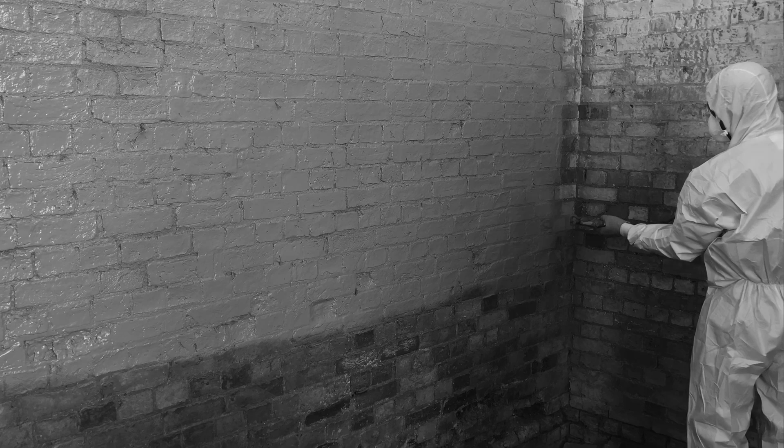Welcome to Intelligent Membranes CPD: Advanced Technology for Achieving Airtightness. We explore the benefits of liquid-applied airtight membranes, how they can be used by main developers, house builders, and contractors to achieve better airtightness performance, which will allow you to provide superior comfort for occupants and users.

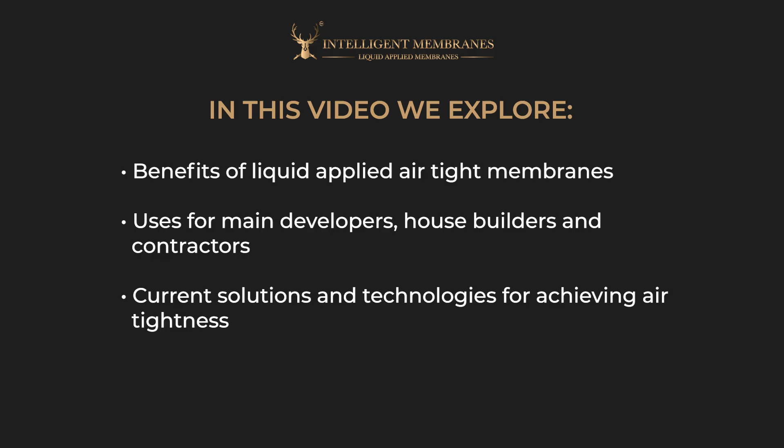Current solutions and technologies for achieving airtightness, and a balanced overview of their pros and cons. Throughout this presentation, we will be making reference to our liquid-applied airtight vapor control coating and how it's revolutionizing the way professionals within construction deliver safe, effective, and sustainable outcomes. We hope you come away with a fresh perspective and an improved understanding of liquid-applied airtight membranes.

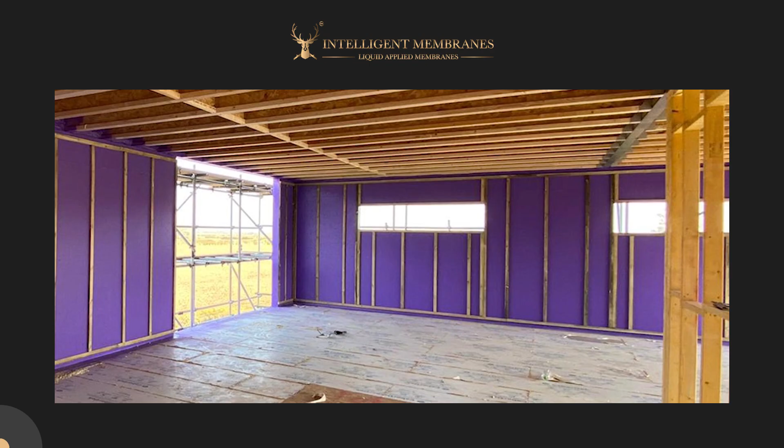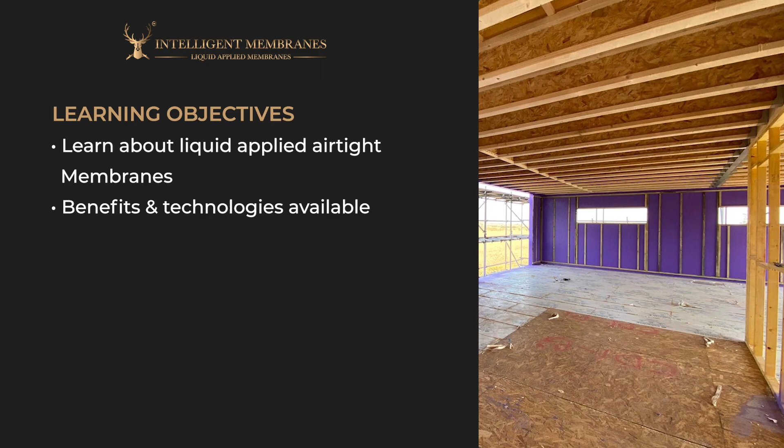We'll begin by outlining the key objectives and success criteria. We will learn more about liquid-applied airtight vapor control membranes and their benefits, and understand the airtightness technologies available. By the end of the session, we hope you will understand the different solutions that are available for achieving airtightness, gain more understanding of the latest regulations around airtightness, and gain more clarity on what makes a liquid-applied membrane effective. We'll address these learning objectives at the end of the session. We recommend making a note of these objectives to use as reference points throughout.

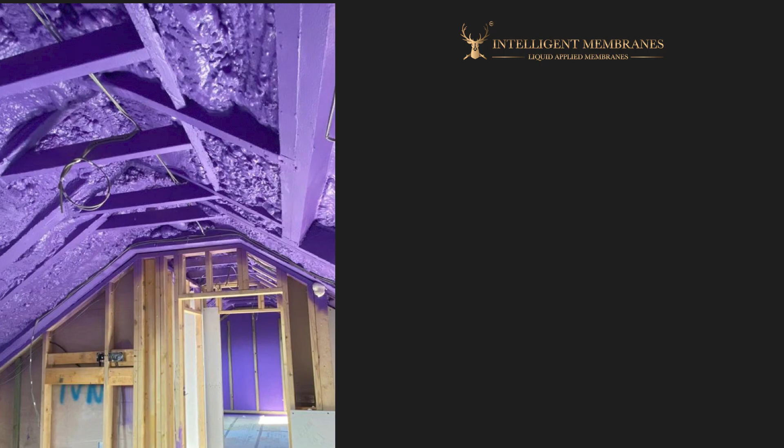However, what is expected and what is achievable are two different things. Quite often, changes in building design and improvements in fabric all have significant cost implications. Here at Intelligent Membranes, we believe that superior effective airtightness should be accessible for all buildings. If we seek the definition in approved documentation, then Approved Document F, ventilation, defines airtightness as a general descriptive term for the resistance of the building envelope to infiltration with ventilators closed. The greater the airtightness at a given pressure difference across the envelope, the lower the infiltration.

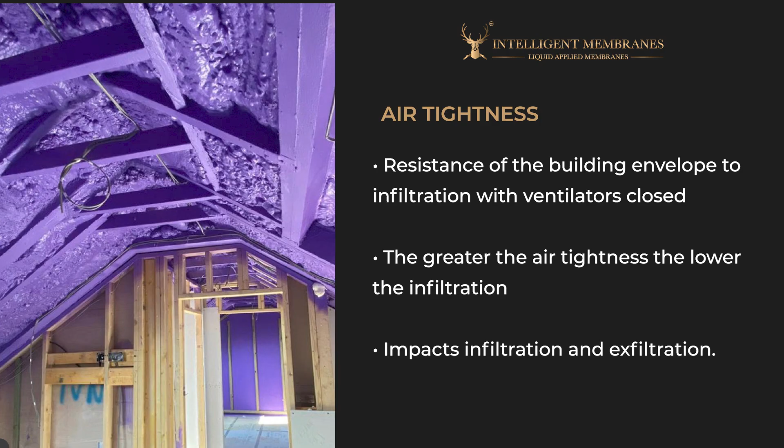Airtightness is the fundamental building property that impacts infiltration and exfiltration: the uncontrolled inward and outward leakage of outdoor air through cracks, interstices, or other unintentional openings of a building caused by pressure effects of the wind and/or stack effect. As you can see from the image, air leakage can occur in multiple places throughout the average household. For example, junctions between walls and other walls or floors, junctions between window frames and walls, electrical equipment and access doors and other wall penetrations. The orange arrows represent air leaking out of the house, whilst the blue and purple arrows demonstrate air leaking into the house.

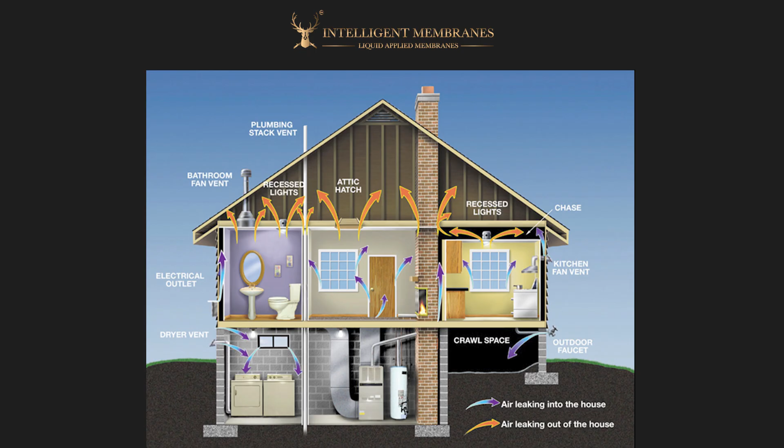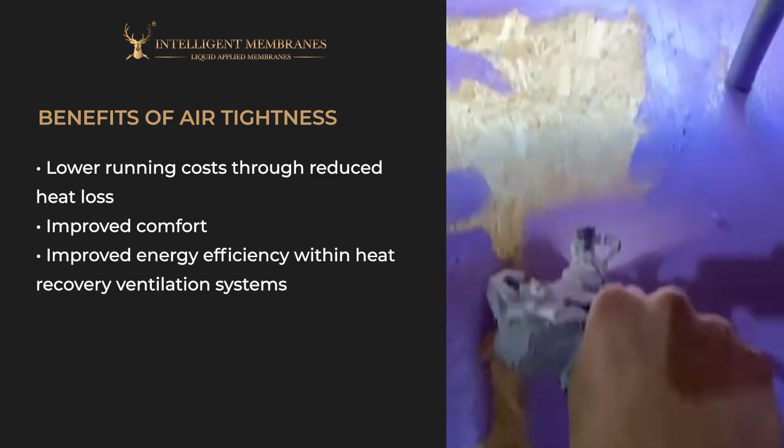An airtight building means an energy-efficient building. Because the mixing of indoor and outdoor air is limited, users will benefit from reduced energy bills from heating and cooling. Energy Star, a government-backed program which provides certification to buildings and consumer products which meet certain standards of energy efficiency, has conducted research on commercial buildings and found that a property can waste as much as 30% of its energy usage due to airtightness issues. By making small upgrades, the energy efficiency of a building can increase by 10%. Having an airtight building has many benefits. These include lower running costs through reduced heat loss, improved comfort, improvement in energy efficiency within heat recovery ventilation systems, improvement in the energy efficiency of the entire building, and reduction in moisture infiltration levels.

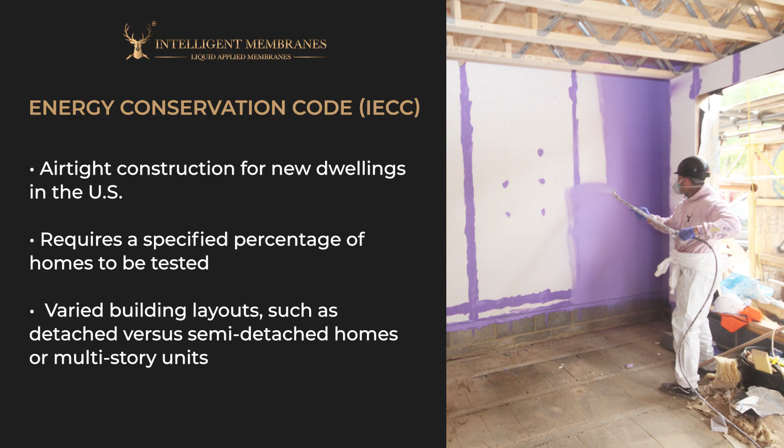The International Energy Conservation Code, IECC, alongside local codes, mandates airtight construction for new dwellings in the U.S. Airtightness testing, aligned with stricter IECC versions, is a standard for new constructions, requiring a specified percentage of homes within a development to be tested. This selection includes varied building layouts, such as detached versus semi-detached homes or multi-story units. The regulations aim at energy consumption reduction, specifying that buildings undergo airtightness testing through the blower-door method per ASTM E779. This involves building pressurization and thermal imaging to detect leaks, setting forth maximum air leakage rates, with a best practice goal to surpass these minimum standards for enhanced energy performance.

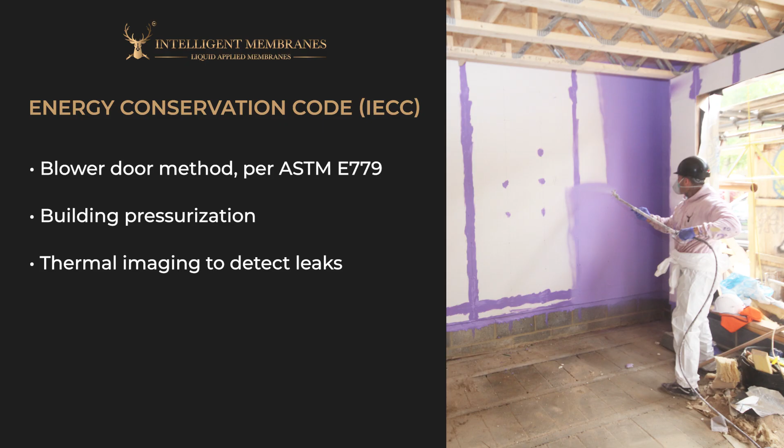Industry discussions suggest updates like pulse testing could refine testing accuracy and compliance stringency, highlighting the importance of evolving standards for energy conservation. Next, U.S. ventilation and energy efficiency guidelines will be examined.

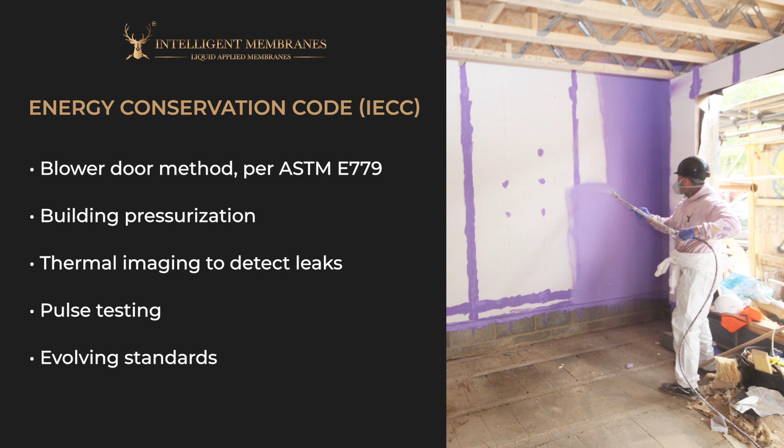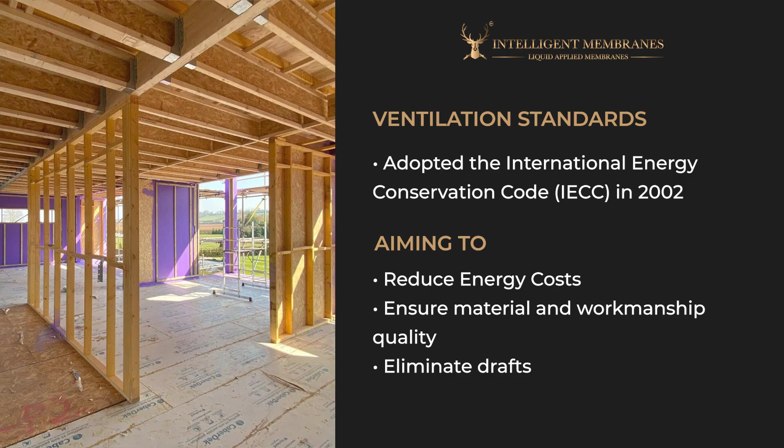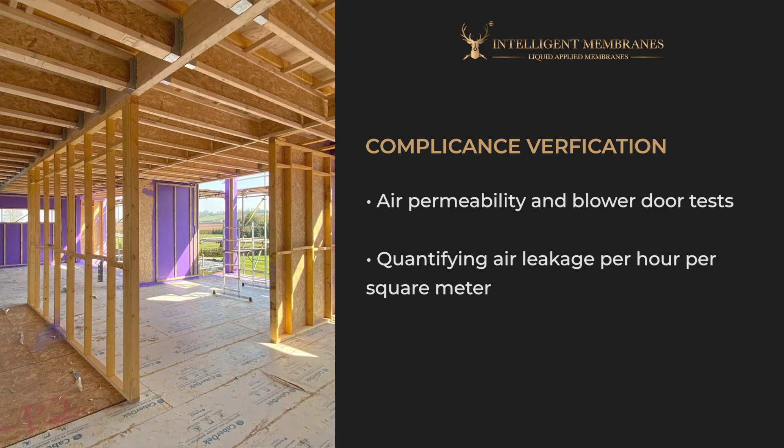In 2002, the U.S. adopted measures under the International Energy Conservation Code, IECC, to enforce building air tightness standards, aiming to reduce energy costs, ensure material and workmanship quality, eliminate drafts, and prevent condensation issues. Compliance is verified through air permeability and blower door tests, quantifying air leakage per hour per square meter at a specific pressure differential.

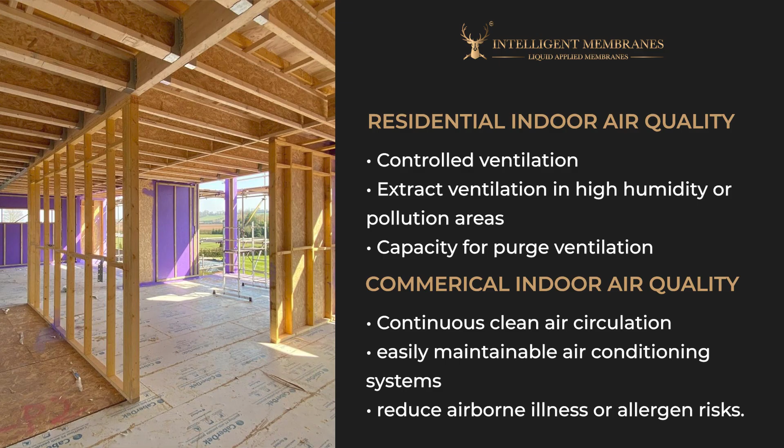In residential settings, maintaining indoor air quality involves controlled ventilation across the property, utilizing extract ventilation in high humidity or pollution areas, like kitchens, and ensuring the capacity for purge ventilation, essentially the ability to open windows for fresh air. For commercial spaces, the focus is on continuous clean air circulation, achievable through easily maintainable air conditioning systems to reduce airborne illness or allergen risks.

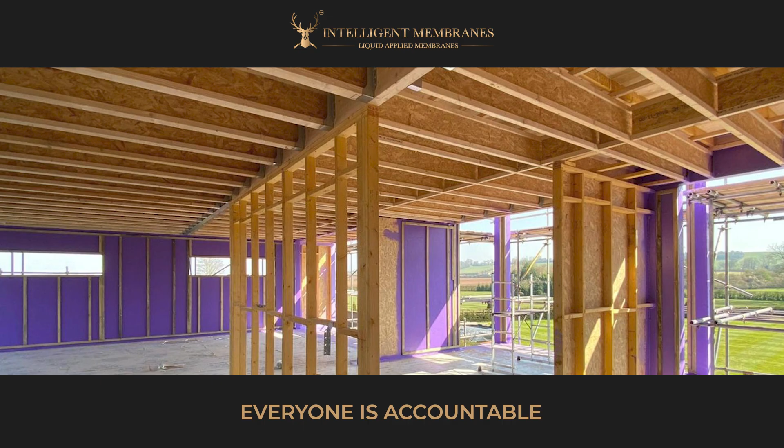The IECC mandates a collaborative approach to air tightness, with designers, site managers, and construction workers all bearing responsibility for implementing and maintaining these standards to achieve energy-efficient, airtight buildings. The following slides will focus on what solutions are available and currently being used to achieve airtightness.

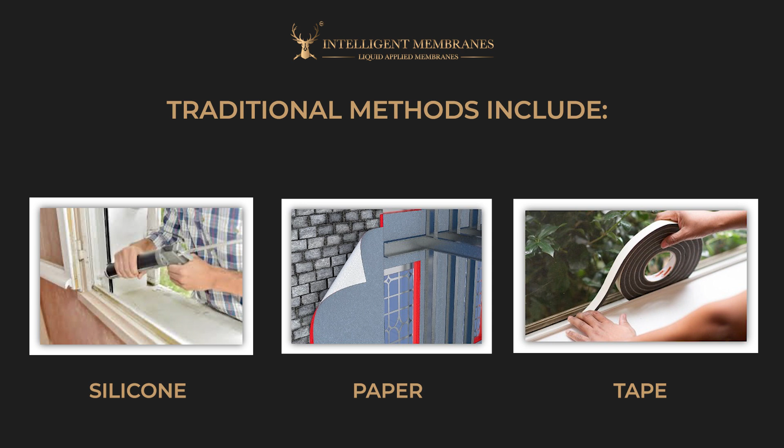Traditional methods of airtightness include the use of silicone, paper, and adhesive tapes. These are all readily available in the market and commonly used throughout the construction industry in new dwellings. Despite their respective popularity, these more traditional methods are not without their faults. We will now aim to address the pros and cons of these methods.

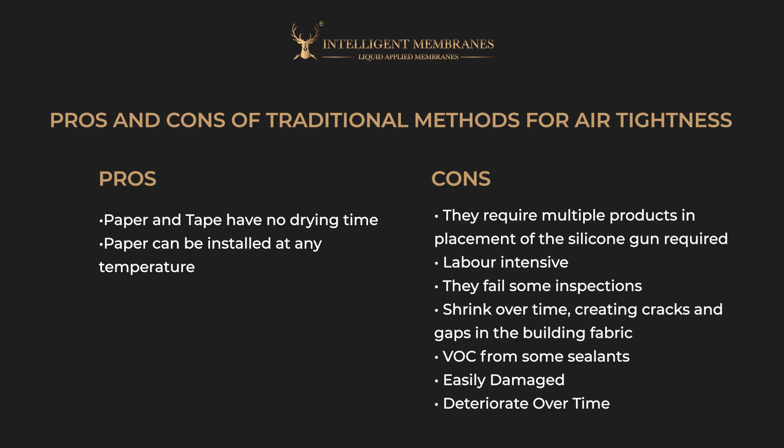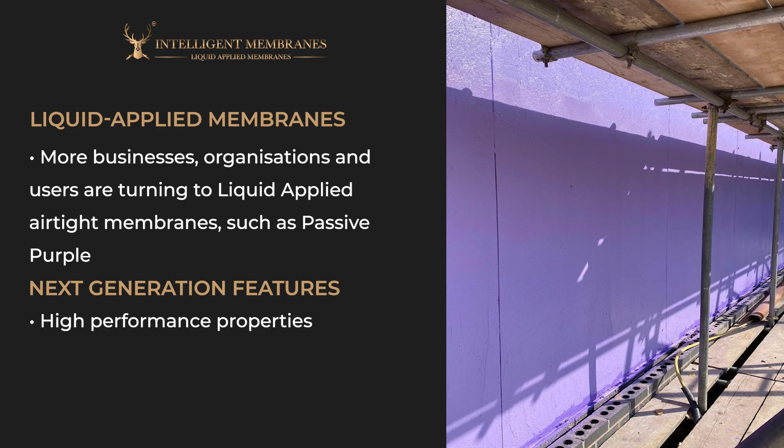In order for professionals like you to support the UK's goals for sustainable and energy-efficient housing, we believe that a solution emphasizing ease of application, safety, and sustainability is essential in today's construction industry. Liquid-applied membranes. More businesses, organizations, and users are turning to liquid-applied airtight vapor control membranes. We refer to them as next generation due to their high performance properties and significant green credentials, helping professionals achieve safer, sustainable outcomes for their clients.

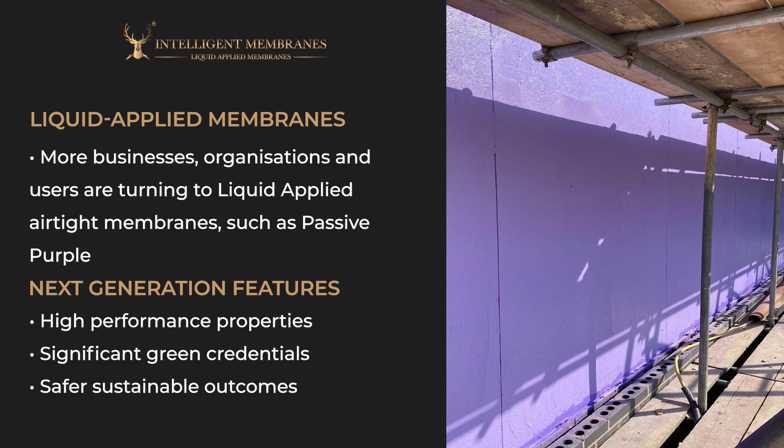We will now outline the scientific characteristics of liquid-applied membranes and why this revolutionary air tightness solution is gaining more and more popularity within the construction industry. A lesson in science. How do liquid-applied membranes work? A liquid-applied membrane is a fully bonded liquid-based coating. Due to its many benefits, which we will outline shortly, you will find this coating being successfully used for a range of construction applications.

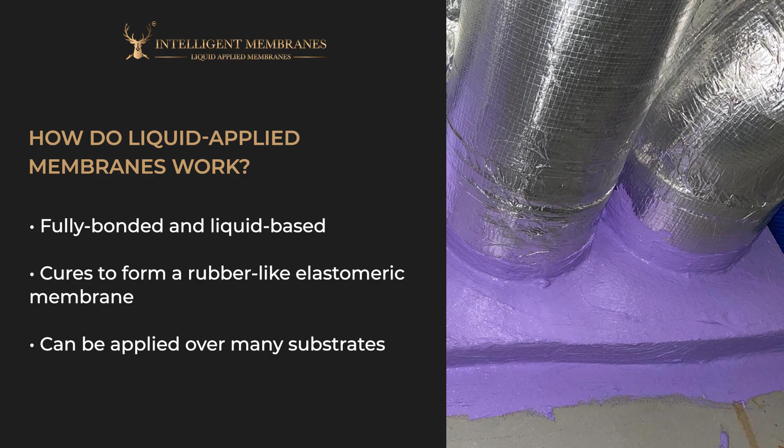The coating cures to form a rubber-like elastomeric membrane and may be applied over many substrates, including blockwork, timber, gypsum board, foam block, woodcrete, spray applied foams, and concrete. We will now explore external and internal use of liquid-applied membranes.

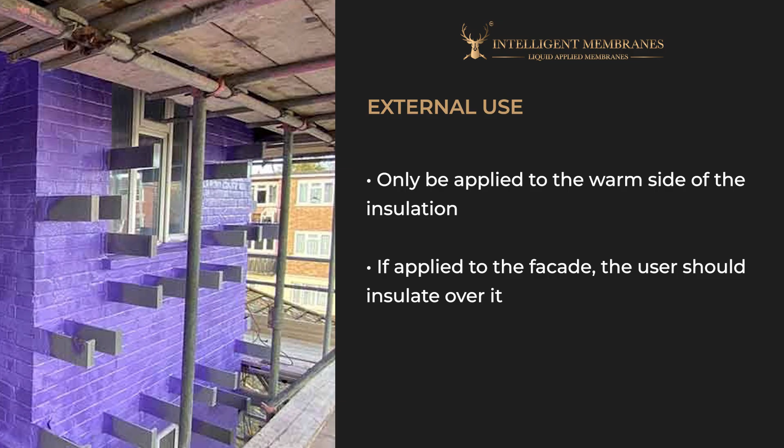It can be applied in any direction by an airless spray device, brush, or roller, and can be used on masonry, brick, timber frame, woodcrete, and foam block. Please note that when using any application device, appropriate measures should be taken. This includes the correct use of PPE, including gloves, goggles and overalls, and respiratory protective equipment, RPE.

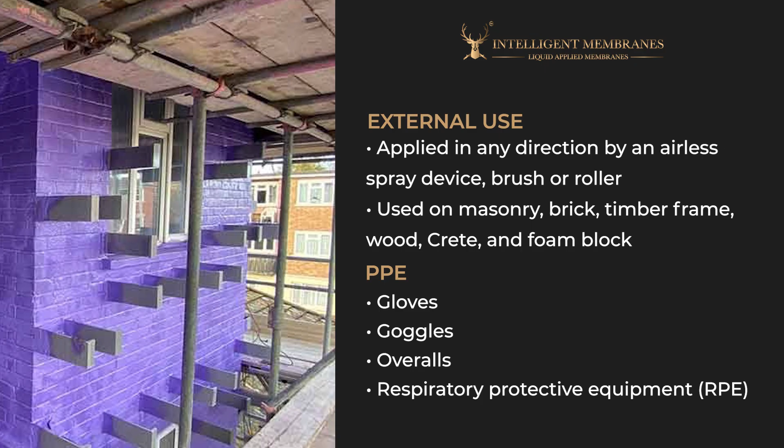When specifying a liquid-applied membrane, look out for VOC-free. Products that are VOC-free don't contain any volatile organic compounds in them. Nonetheless, protective measures should always be taken to ensure safety to the user.

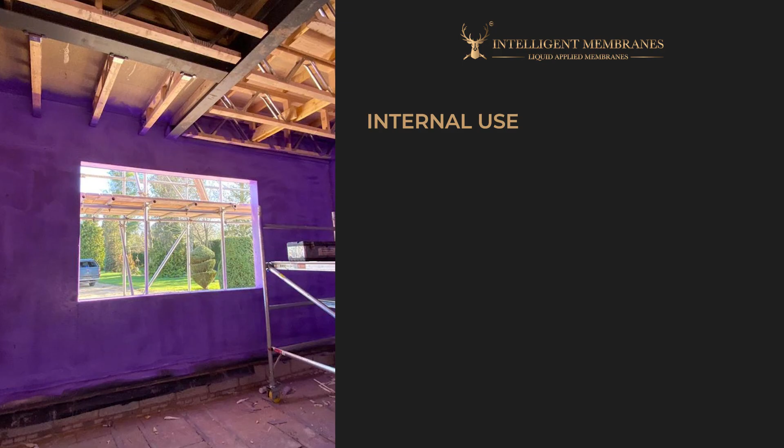Internal use of liquid-applied membranes. Air leakage paths, which are commonly found in dwellings, can be easily controlled through the internal use of a liquid-applied membrane. This particular membrane can be applied in any direction by an airless spray device, brush, or roller. It can be applied onto blockwork, timber frame, SIPs joints, ceilings, door and window joints, floor and wall connections, pipe penetrations, and more.

Please note the techniques of minimizing joints or using inherently impermeable materials, like concrete or sheet panels such as ply, OSB, or CLT, are fundamental to an approach to designing and specifying for airtightness. As previously mentioned, always ensure you use appropriate PPE when using any liquid-applied membrane product.

Why liquid-applied membranes? This advanced technology is revolutionizing the way builders achieve airtightness, and this table demonstrates some of the many benefits that a liquid-applied membrane will have within your application. The client/end user will save time and money whilst having the best performing product the market has to offer. It doesn't hide the problem, it becomes part of the fabric itself.

Ease of use, easy application in the most challenging of locations and objects. It doesn't deteriorate over time, meaning that airtightness will maintain its longevity. Super fast application with either a brush or spray. Extremely durable: after it dries, it turns into a hardened polymer, which has a lifetime guarantee of airtightness. No continuously searching and repairing for paper rips and tears.

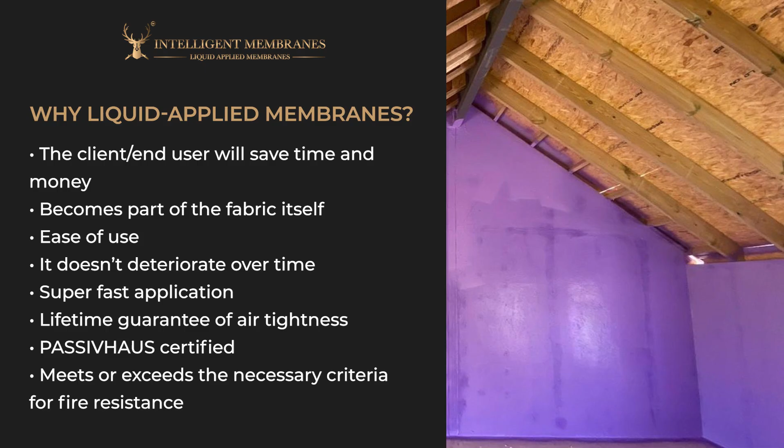At Intelligent Membranes, our liquid-applied membrane has undergone rigorous fire safety testing in accordance with U.S. standards, such as those set by NFPA, the National Fire Protection Association, or ASTM International. It meets or exceeds the necessary criteria for fire resistance, ensuring compliance with U.S. regulations for building materials used in structures of all heights.

Liquid-applied membranes: technical benefits. From a technical perspective, we'd like to take this opportunity to highlight some of the main technical benefits that our liquid-applied membrane has to offer. As previously stated, it is Passive House certified, which is said to be one of the most carbon-friendly construction methodologies in the world today. Very low air leakage rates are required by the Passive House standard and must be demonstrated for each certified building by means of a blower door airtightness test. The air change rate must be less than or equal to 0.6 air changes per hour under test conditions.

It also meets stringent industry standards similar to those recognized by organizations such as ASTM International in the U.S. Our liquid-applied membrane adheres to the rigorous quality and performance metrics equivalent to U.S. standards for liquid airtight vapor control layers. It is a radon barrier. Inside a building, people inhale tiny particles of radon, which then irradiate the lining of the lungs. Radon can cause lung cancer, and it poses a particular threat to children, smokers and ex-smokers. This odorless gas is the second leading cause of lung cancer after smoking.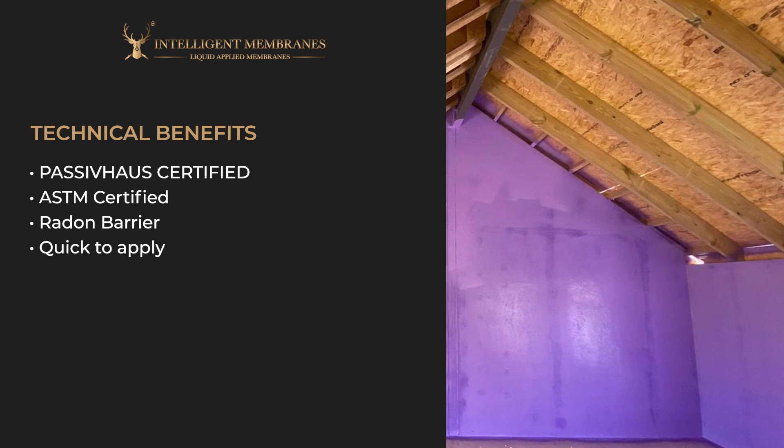A single installer can apply up to 300 square meters of Passive Purple a day using an airless spray device. This speeds up the construction time and cuts labor costs dramatically. It is M1 class, which is the emission classification of building materials. Materials that are M1 class are low emitting, so that material emissions do not increase the requirements for ventilation. VOC-free: it is a water-based product, which means no nasty chemicals, and it's friendly for the user and the environment.

Volatile organic compounds, VOCs, are organic chemicals that have a high vapor pressure at ordinary room temperature. Some VOCs are dangerous to human health or cause harm to the environment. Many airtightness solutions contain harmful VOCs due to their ease of use in application. So a product that doesn't have any VOCs will have better outcomes for you, the installer, and the end user.

Finally, this liquid-applied membrane can guarantee you a score of 0.6 air changes per hour and under, as tested by the Passive House Institute with an airtight score of 0.03. That's 20 times under the required 0.6 needed. We'll now take a look at two examples of where liquid membranes have been used for airtightness.

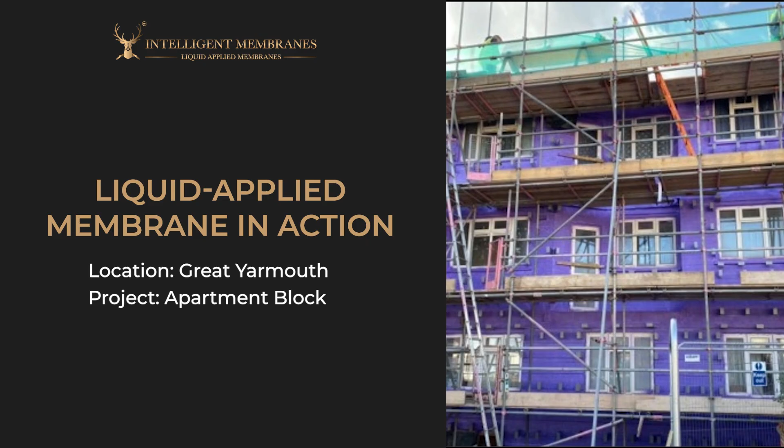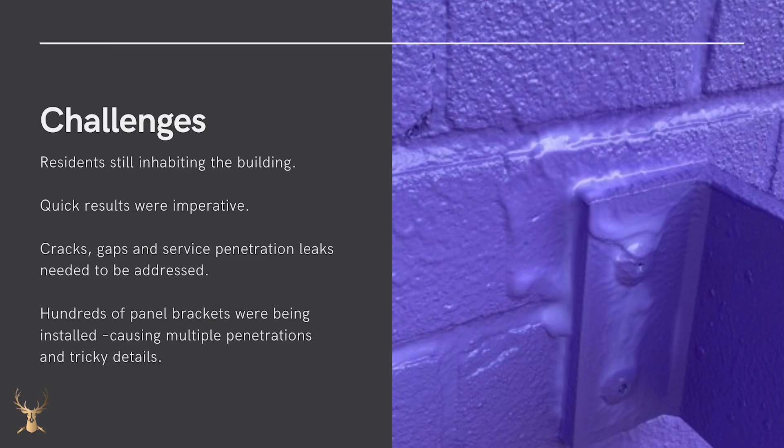Case Study 1. Our first case study comes from an apartment block in Great Yarmouth. With people still inhabiting the building, the installers needed to overcome a multitude of challenges to achieve maximum results. This liquid-applied membrane was used as an airtightness membrane sprayed to the outer face of the original walls. Brackets were then fitted which created a void for the eco-bead insulation. The walls were finished with ply board, a frame with a membrane, battens, and a pre-finished render board with a textured finish. The apartments were being improved from SAP EPC ratings of D and C.

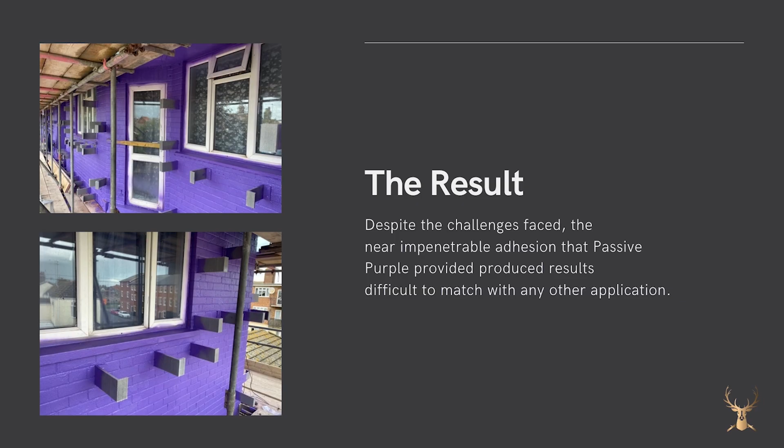Case Study 2. Our next case study comes from a passive build based in Cambridge. Here you will see the results of when our liquid-applied membrane brush is used to seal all connections of a variety of substrates from steel to timber, and finished with the spray application.

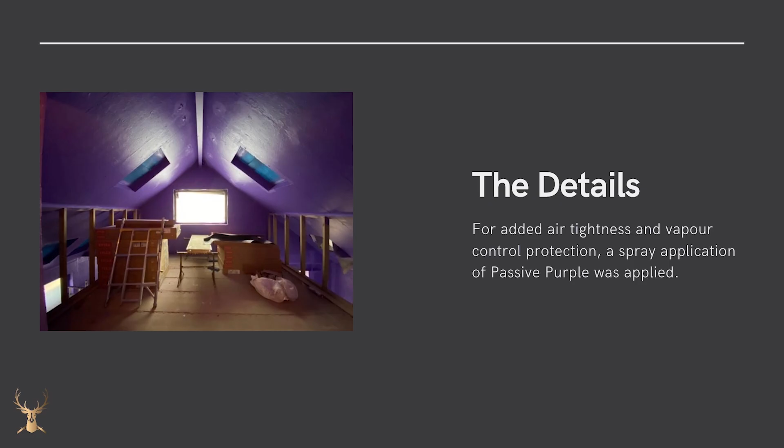Reflecting back to the start of this CPD and the learning outcomes that were set out, you should now have a clear understanding of the different solutions available for achieving airtightness, the latest regulations around airtightness, and the revolutionary benefits a liquid-applied membrane can have. We hope you've enjoyed our CPD on advanced technology for airtightness, and we hope that this new knowledge will help you to achieve improved outcomes for you and your clients.